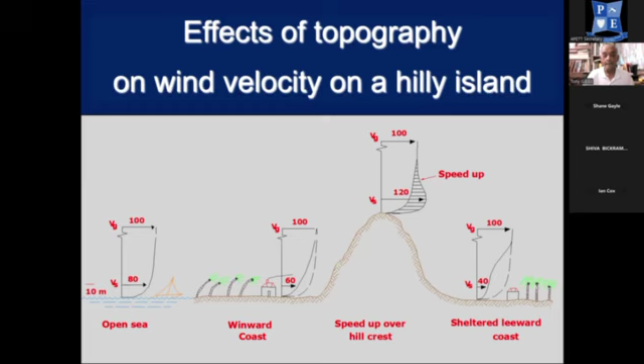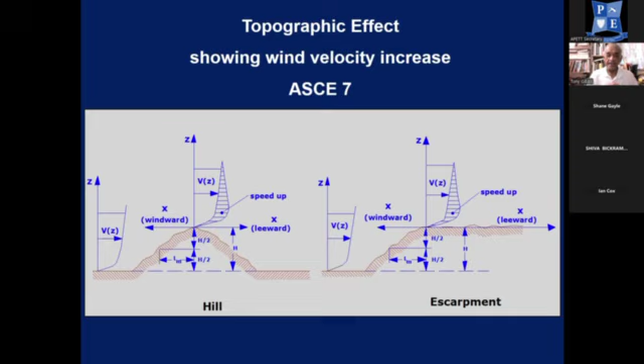In our wind loading standards, we do have guidance on how to deal with the topographic effect. In the popular American Society of Civil Engineers Standard 7, there are diagrams such as this, which provide indications of how to adjust wind speeds for topography. The numbers aren't on my slide, but they're in the ASCE 7 document, readily available to engineers online.

The next parameter we have to deal with is ground roughness, and that tends to be affected separately from topography, depending on the density of the buildup of the environment.

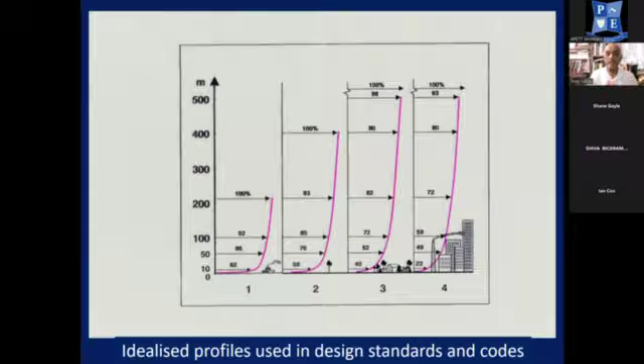Those are idealized. Now, in recent decades, we have been dropping what are known as dropsonde instruments through the eye walls of hurricanes to determine the real profiles as you go from the ocean up to the height where the airplanes fly. We do not drop dropsondes over land, only when the hurricane is over the ocean.

So these are real indications from instrumental measurements of the effects of height above the ocean on wind speeds, quite different from the idealized curves you've seen before. But you can't easily work with the reality in doing your calculations, so we do use the idealized curves.

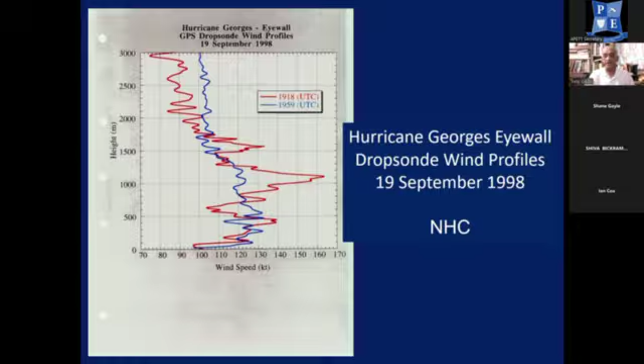These are dropsonde wind profiles from Hurricane Georges in 1998, and these are from Hurricane Ivan in Cayman in 2004. Again, it's quite far removed from the idealized curves you saw two slides ago.

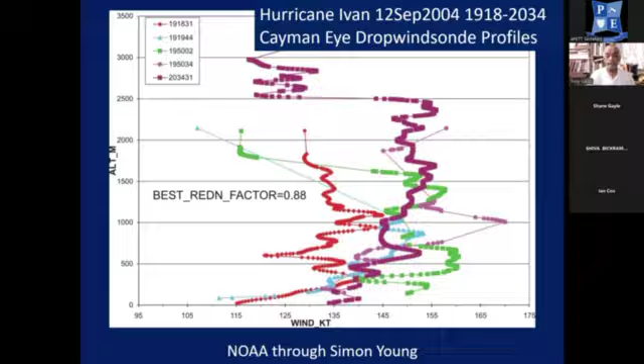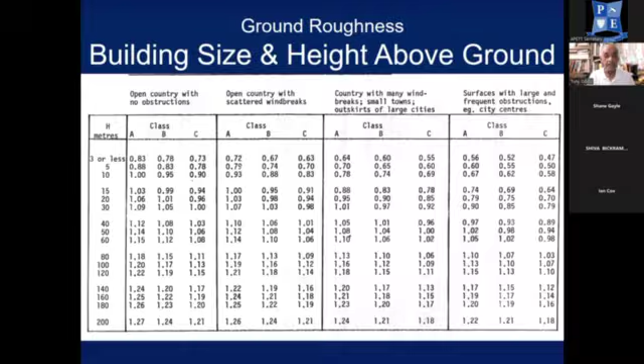A being components, very small elements. B are small buildings, and C are large buildings. This is what we dealt with in the 1970 Wind Loads for Structural Design, and we retained this table in the 1981 newer edition.

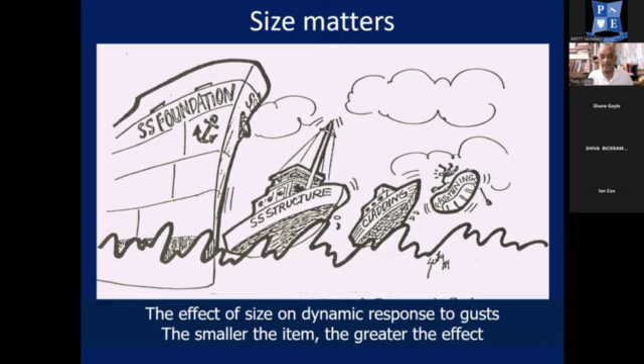If you have a very large tanker, it hardly recognizes the ripples in the ocean. A smaller, large fishing vessel is represented by SS structure, and has a greater effect from the waves. A small fishing vessel is like the cladding on a building, with an even greater effect. And a canoe, a very small structure, is greatly affected by the waves, which we call the fastening. So you go from foundations, to overall structure, to the cladding, to the fastening of that cladding. The smaller the element, the greater the effect of the gusts.

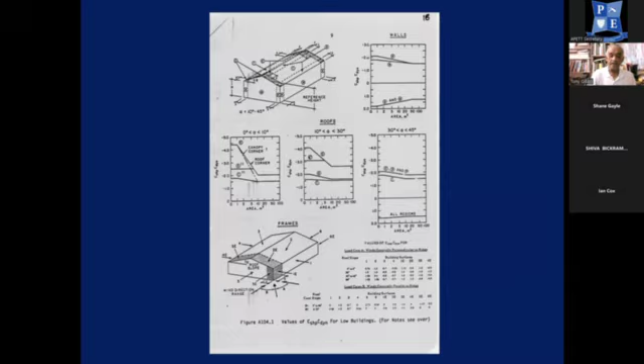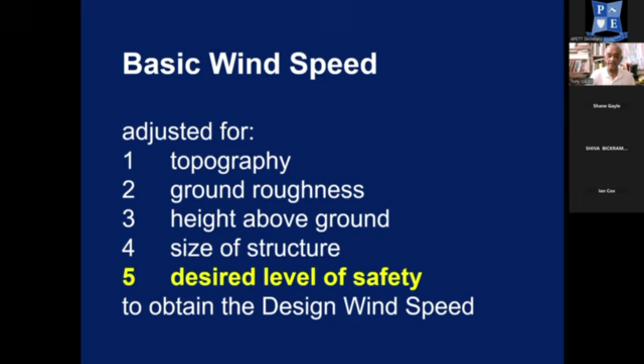Item 5 is a desired level of safety. Not all of our facilities need to be equally safe. Typically, temporary structures and farm buildings, like what covers our chickens in poultry farms, are given the lowest standard of safety. The majority of buildings in the community are given the next standard of safety up. Our critical facilities, such as referral hospitals, have an even higher level of safety than our domestic homes. And at the top of the line are facilities which, if they fail, would cause significant loss of life, like chemical plants and oil refineries. So the desired level of safety is adjusted depending on the kind of facility.

This is a very serious matter. We have been underestimating load factors for islands in the Caribbean closer to the equator for many years, islands such as Trinidad and Tobago. So the load factor increases as you move from Cuba in the north, or Bahamas even further north, down to Trinidad in the south.

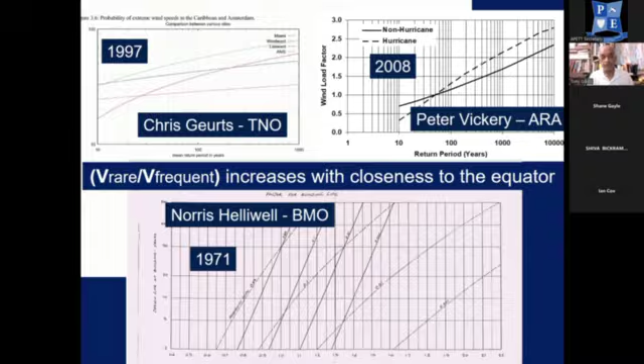It took Peter Vickery, much later, in his 2008 study for the Caribbean, done at the request of the Pan American Health Organization, to explain clearly what was happening. So Helliwell in 1971, Geurts in 1997, and Vickery in 2008 all came up with the same conclusion, that rare hurricanes divided by frequent hurricanes, the wind speed from rare hurricanes divided by the wind speed from frequent hurricanes, that ratio increases with closeness to the equator. And that has a significant impact on what we should be doing in Trinidad and Tobago.

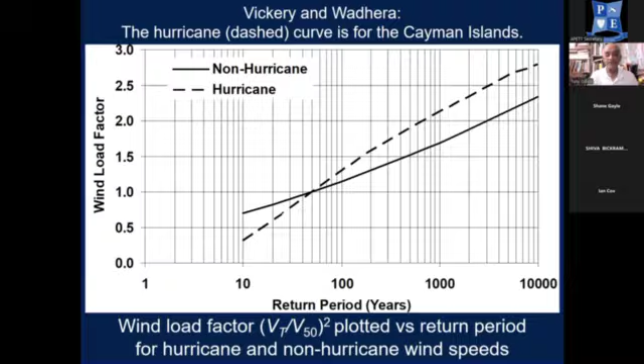This is Vickery's diagram, which he produced in 2008, and he did a revision to the wind hazards in 2019. He's retired now, but still a fairly young man. Why they retire, I don't know. But he felt he's done enough, so he's enjoying himself now.

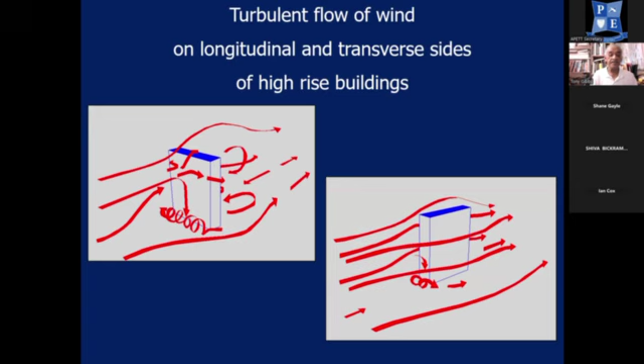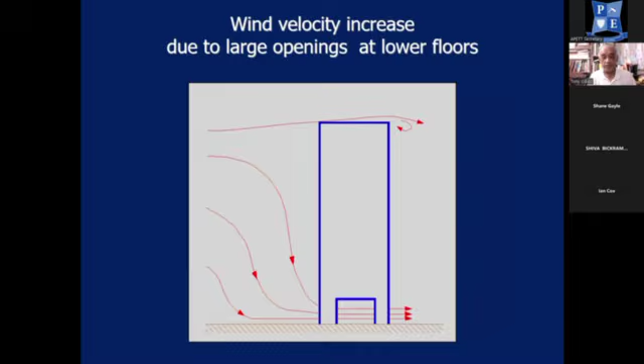So let's go to wind flow around structures. We can't see the wind, but if we put fumes or effectively put things in a wind tunnel, we can get visualizations of what happens as wind impacts on buildings. These diagrams give a general picture of the flow of wind around high-rise buildings. In this case, if the high-rise building has an obstruction upwind of it, or if it has large openings at the base of the building, you get an acceleration of wind speeds in that location.

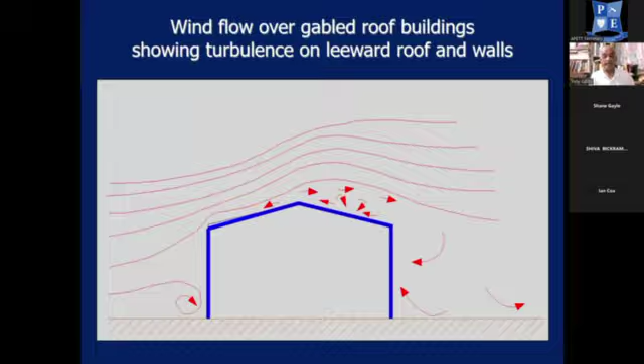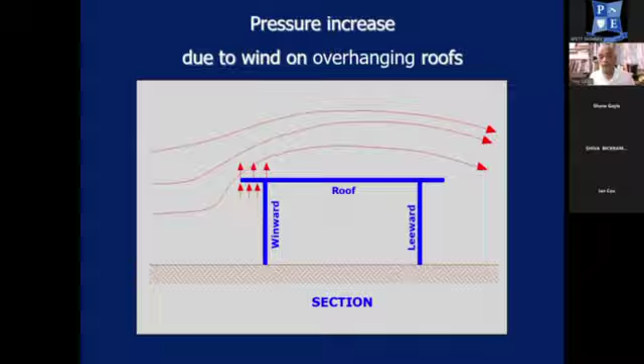This is a conventional industrial building with a portal frame. What you're seeing here is a lot of turbulence on the leeward roof slope and turbulence on the leeward face of the building as well. This diagram illustrates that if you have roof overhangs on the windward side, you get uplift suctions, and under the eaves, you get pressures. Those are particularly onerous forces added together for overhangs to resist.

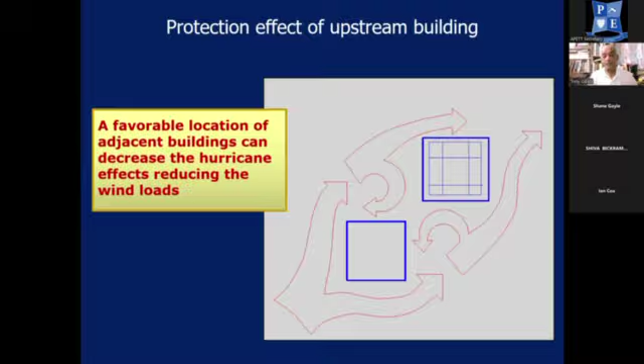Buildings usually are not in isolation, and buildings upstream of your building will affect the wind flow around your building. Of course, we can't determine for perpetuity what the environment upstream and on all sides of your building will be, but it's useful to have some idea of what it could be. In Melbourne, Australia, every new building downtown, as part of the planning process, has to be subjected to wind tunnel tests to determine how that new building will affect existing buildings and ground level wind speeds for pedestrians in the vicinity. That's a planning requirement in Melbourne, and no doubt in other parts of the world.

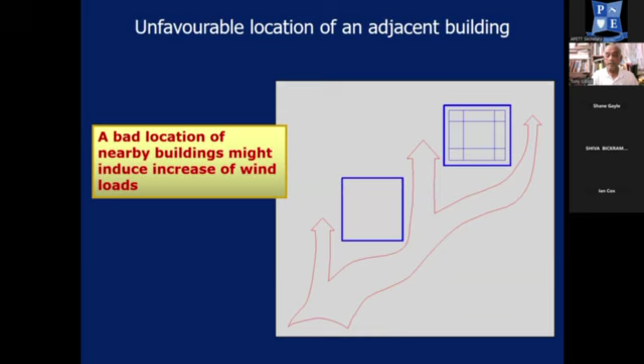So adjacent buildings do affect the flow around your building under investigation. Let's look at pressure distributions.

When the Sydney Opera House was being designed, wind tunnel tests on buildings were done in aeronautical wind tunnels, which were designed to determine what happens to aeroplanes, typically high above the ground. So these were smooth flow aeronautical wind tunnels. I was actually working for Ove Arup and Partners in London when they were doing the structural design for the Sydney Opera House. So in my old age, in 2025, as one of my bucket list items, I'm going to see the Sydney Opera House in December this year. It's a long trip. So the Sydney Opera House was tested in a smooth flow wind tunnel.

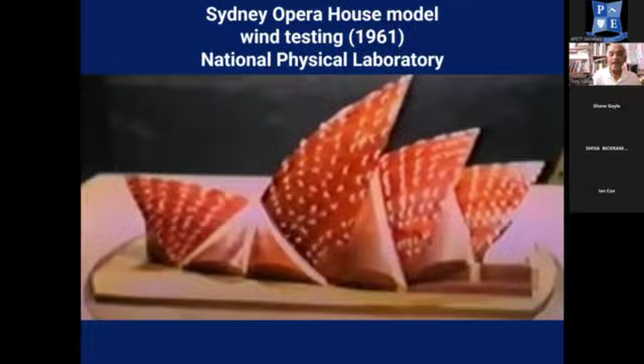What happened after that was that some young researchers, led by Professor Alan Davenport, who died of complications from Parkinson's disease in 2009, along with people like Professor Cermak in Colorado, decided that testing buildings in smooth flow wind tunnels was not realistic.

And they developed boundary layer wind tunnel laboratories. One of the most famous and groundbreaking ones was the boundary layer wind tunnel laboratory at the University of Western Ontario, and Davenport was at the forefront of that kind of research. He was one of the most famous and much loved wind engineers of the 20th century. I was fortunate to know him well. He was my mentor, and almost everything I know about wind engineering, I learned from Professor Alan Davenport.

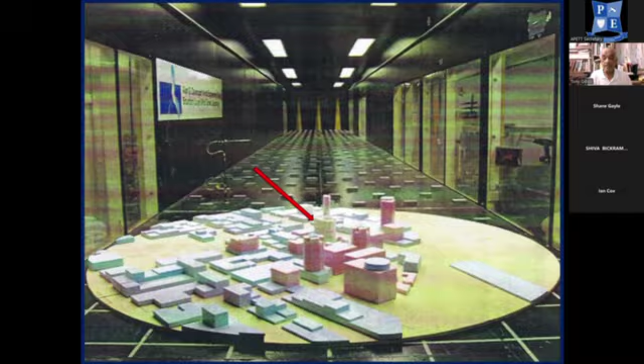This is a picture in his wind tunnel at the University of Western Ontario, and what you see in the foreground is a model of Port of Spain. The red arrow is pointing at the building being investigated in this particular experiment - that's the Ministry of Education building.

It was tested to determine the pressures on the glazing for that building. That was one of the purposes. Also for the loads, the horizontal loads from wind on that building. And thirdly, the effects of that building on pedestrian comfort at ground level on the pavements.

This particular picture is a close-up of the turntable in the wind tunnel. You can see on the upper left, Nicholas Tower; on the upper right, the twin towers of the Central Bank and the Ministry of Finance; and in the middle, in a cream color, the model being tested - the Ministry of Education Social Development building. In the bottom left-hand corner of the slide, you can see a photograph of the completed building.

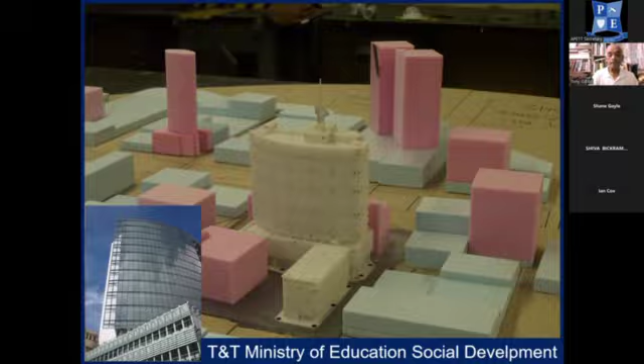So let's look at some pressure coefficients on different shapes of buildings. This is a simple rectangular high-rise building. It has 5 surfaces - 4 walls and a roof. The windward wall has positive pressure. The other 4 surfaces - the sides, the leeward wall, and the flat roof - all have negative pressures, or suctions.

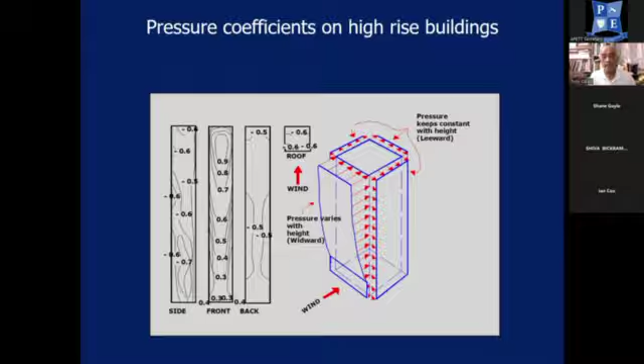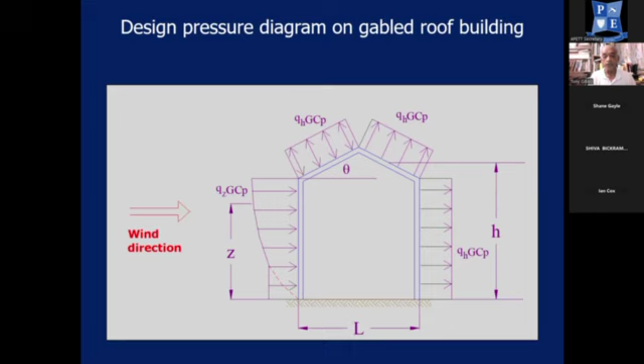What you'd also see is that on the leeward wall, the pressures are very even from top to bottom, whereas on the windward wall, it varies significantly with height above ground. In this portal frame building, you have the windward wall with pressures varying with height, and the leeward wall with fairly even, similar pressures from top to bottom. The windward roof can have either positive or negative pressures depending on the slope of the roof, but the leeward roof is always negative, always a suction. Again, in this building, you see the windward wall with varying pressures and the leeward wall with even pressures.

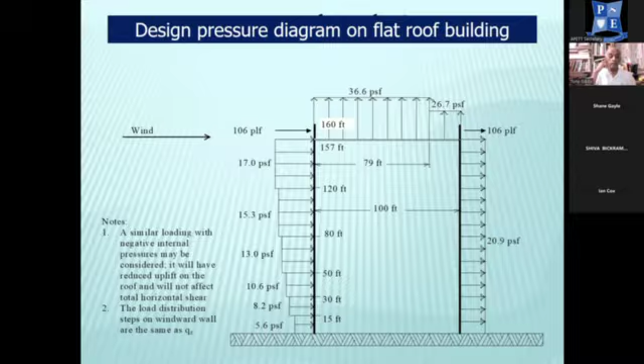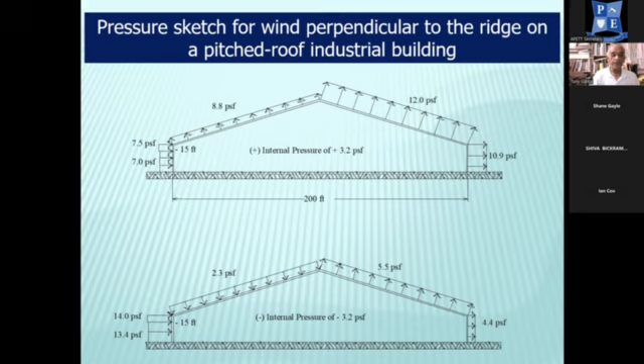In this industrial building, there are 2 diagrams. The upper diagram shows a situation with positive internal pressures, and the lower diagram shows negative internal pressures. So the internal pressures are the same throughout the inside of the building, but the external pressures or suctions vary depending on the shape of the building. The two are algebraically added to give you the forces for which you must actually design the cladding.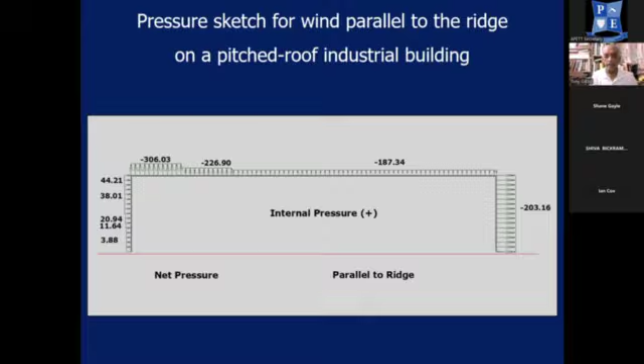If you look at that same pitched roof industrial building with the wind parallel to the ridge, this particular diagram shows the pressure distribution with internal positive pressure.

Now, there are ways of reducing the wind pressures and wind forces on buildings - there are things you can do. In the case of roof geometries, an increased slope would lead to a reduction in the pressures up to a point. So roof slopes between 20 and 30 degrees are favorable.

Hip roof geometries are safer than gable roof geometries. A lot of experiments have been done on this. The one I'm familiar with was done in the 1980s as an MSc thesis, also at the University of Western Ontario, and the results were interesting. They indicated that the average pressures for hip roofs and gable roofs are similar. However, the pressures are more evenly distributed over a hip roof than over a gable roof. Interestingly, one reason hip roofs are safer in hurricanes is that they require better quality carpenters to make them.

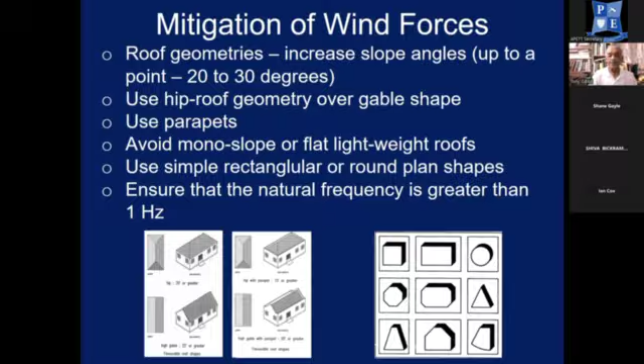So let's look at some examples of the effects on structures in the Caribbean. Commonly, the roofs suffer the most. Lightweight roofs suffer the most. This is from Hurricane Gilbert in Jamaica.

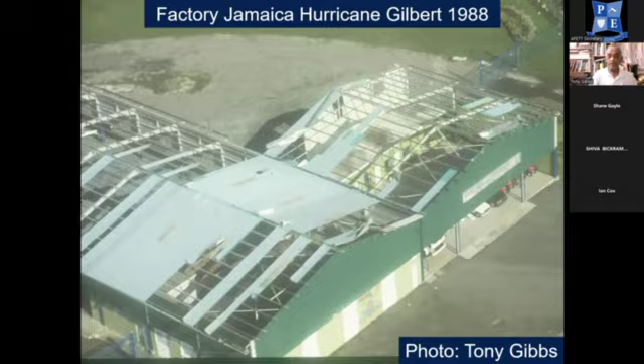When Queen Elizabeth II visited Barbados in October 1985, she did not have to compete with Marilyn Monroe, because the dressmakers for royalty know that wind lifts things up. So her skirts had little bags of lead shot sewn into the hems to keep the skirts down. So I'm sorry about that — we have no idea the shape of Queen Elizabeth II's thighs.

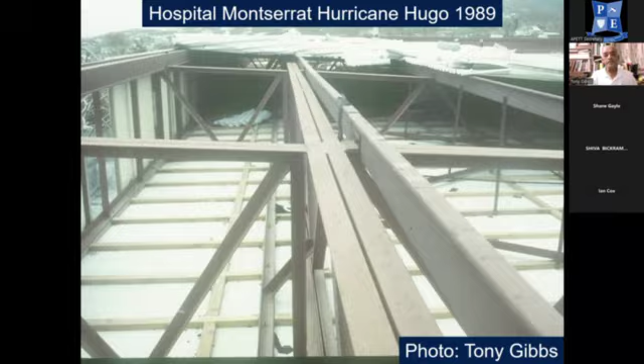In Montserrat in 1989, there was a major Hurricane Hugo. It took off two-thirds of the roof sheeting for the hospital, which, by the way, was designed in Trinidad. But the rest of the building was secure. Those roof sheetings were held on in the manner illustrated in this photograph. I took these photographs four days after Hugo, so many of the sheets were still intact, and I was able to take this photograph.

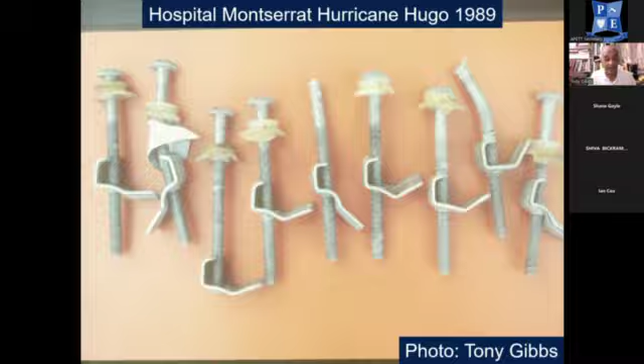I was also able to collect bags of failed connections, and you can see that some of them failed in direct tension. These are 7mm diameter aluminium bolts, and for them to fail in direct tension, I calculated that the upward wind pressures on the roof sheeting were approximately 150 pounds per square foot — quite significant. I gave one of my bags of failed connections to the Civil Engineering Department at St. Augustine so they could carry out experiments, but they never got back to me. If they did carry out the experiments, I never saw the results.

When you go to a place devastated by a hurricane, you usually relearn existing lessons; sometimes you learn new ones. This was new — for me, this was brand new. I'd never seen a failure of the longitudinal splitting of timber rafters in a hurricane.

I saw it in 1989 in Montserrat, three years later in the Bahamas for Hurricane Andrew, and in 2004 again in Grenada for Hurricane Ivan. In all those cases, what initiated the failure was a form of fixing of the rafters which I would have thought was very safe — drill holes through the rafter at the eaves point, thread a reinforcing rod through those holes, and encase the whole thing in the ring beam. But those holes drilled through the rafters were the initiation of the horizontal failure of those rafters. So what seemed to be a very safe fastening system turned out to be not at all safe.

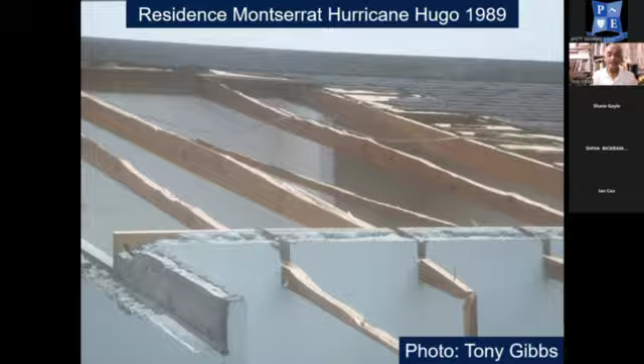I've seen that happen in Montserrat, in the Bahamas, in Grenada, and no doubt we'll see it again the next time we go to a hurricane-devastated country.

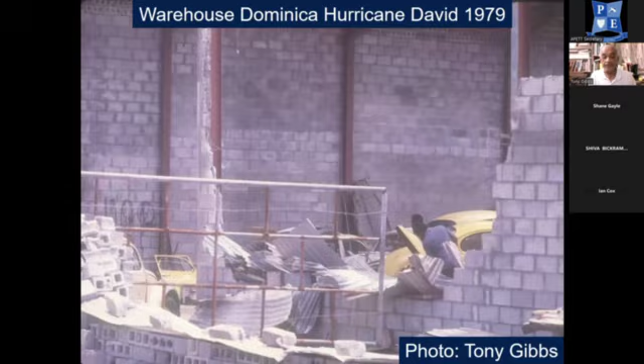People think that it's only earthquakes that destroy masonry, but wind destroys unreinforced masonry too, as you can see here in David in Dominica. People also think that if you employ top-class architects and engineers, you are ipso facto safe.

Not so. This hospital in Jamaica was designed by the firm Architects Collaborative, Walter Gropius's firm. Walter Gropius was one of the most famous architects of the 20th century — a German of Bauhaus fame, with a firm in Massachusetts, Architects Collaborative. They designed the Cornwall Regional Hospital near Montego Bay in Jamaica, whose wards had to be evacuated during Gilbert because the windows blew out.

Industrial buildings in Dominica.

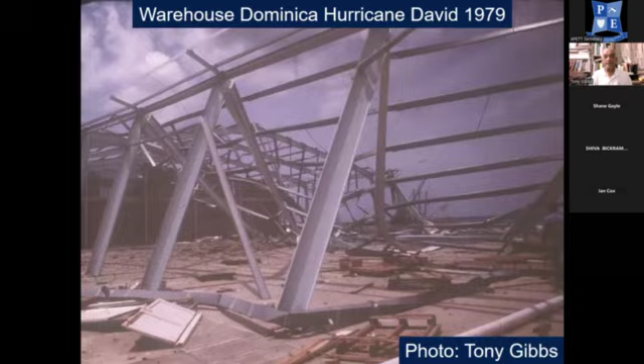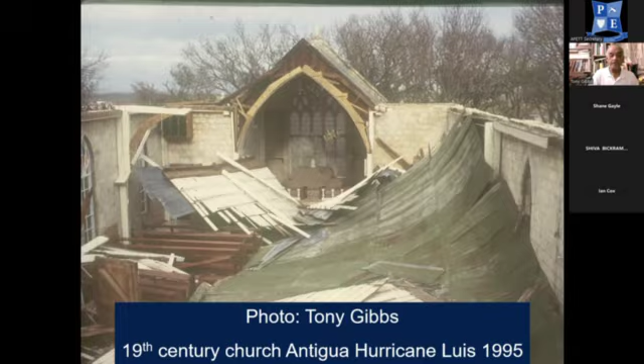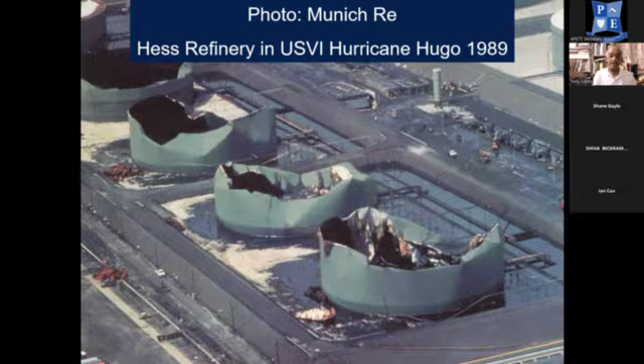Trinidad used to have a large oil industry, and at one stage Texaco Refinery was one of the 4 largest oil refineries in the world. But the largest oil refinery in the world in 1989 was the Hess oil refinery in the United States Virgin Island of St. Croix. Hurricane Hugo destroyed all of the oil storage tanks, and the Hess oil refinery never fully recovered. That refinery is no longer 800,000 barrels a day; it's a much smaller refinery, if it still exists at all.

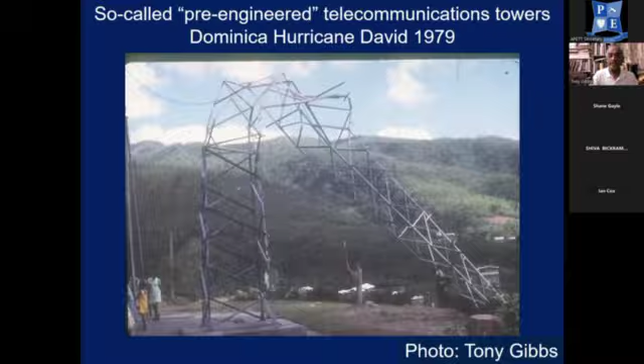This happens because in 1953 the first modern wind loading standard for the British Standards Institution was published, which had 75 miles per hour as the maximum wind speed. So a lot of these structures are inadequately procured. Be careful when you're procuring standard pieces of equipment.

So you don't need a fortune to be safe.

The 3 great churches on Church Street in St. George's, Grenada, were all destroyed by Hurricane Ivan in 2004. The Catholics repaired theirs soonest, followed by the Anglicans, but there were very few Presbyterians living in Grenada, and it took them a long time to get the funds to repair the Presbyterian kirk. They had masonry walls which were destroyed by Ivan.

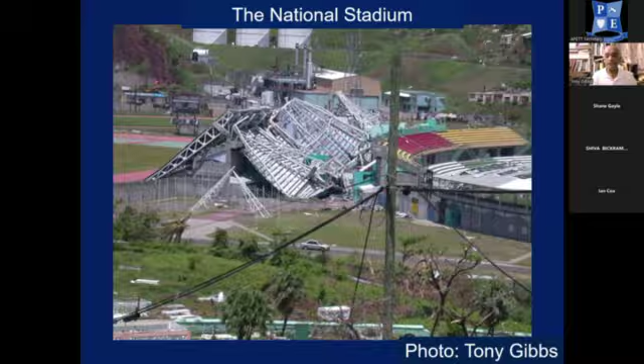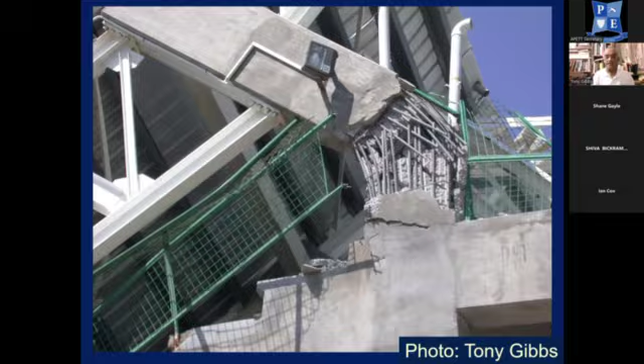As you can see, this is how they detailed the splices of the concrete columns to their bases. Can you imagine that this would happen in a hurricane? Can wind do this to reinforced concrete? It did. So any material can be sufficiently badly designed, detailed, constructed, and maintained to fail in a hurricane.

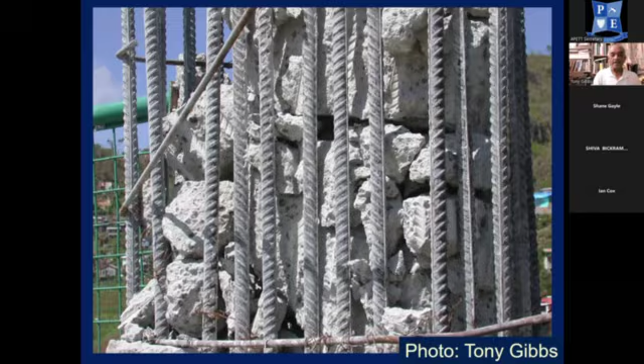Now let's talk about something else which is not commonplace: the understanding of the dynamic wind effects on solar PV ground mount systems. On the 8th of October this year, I, along with a former vice president of APETT, visited the largest solar PV ground-mounted installation anywhere in the Caribbean, at Brechin Castle.

Dynamic wind effects are crucial considerations in the design of solar PV structures, impacting their safety, efficiency, and longevity. The key effects include resonant vibrations, torsional galloping, and flutter. These phenomena can lead to severe structural damage if not properly mitigated. So understanding and designing for these effects ensures the resilience and stability of solar installations under damaging wind conditions.

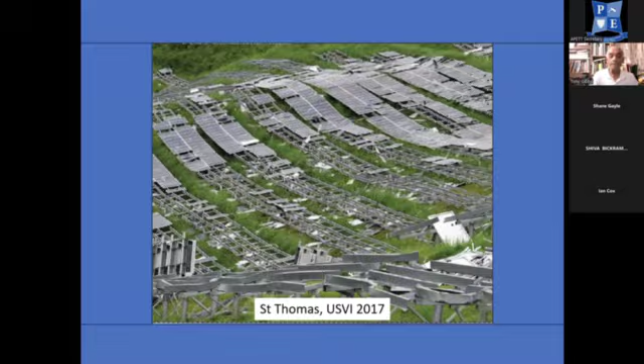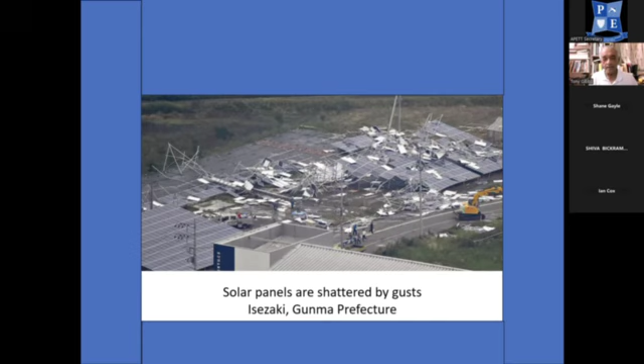Don't take it for granted that they're going to be safe. This is St. Thomas in the US Virgin Islands in 2017. And this is solar panels in Japan, a highly developed technological community, shattered by gusts in Isezaki, the Gunma prefecture in Japan.

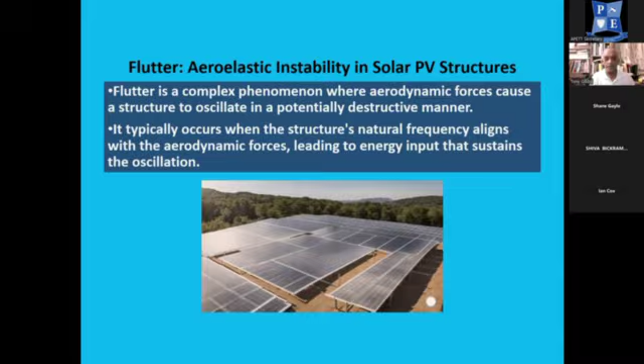Flutter, which is aeroelastic instability in solar PV structures, is not unknown. Flutter is a complex phenomenon where aerodynamic forces cause a structure to oscillate in a potentially destructive manner. It typically occurs when the structure's natural frequency aligns with the aerodynamic forces, leading to energy input that sustains the oscillation. If you look very carefully, you can see some motions in the picture below. Let's go on.

Two months ago, I was visiting a friend in Maraval, Port of Spain. And I could not believe my eyes because I saw demonstrated in the living room of my friend's home something I knew about, I read about, I studied, I understood from an academic standpoint, but I'd never seen it. And there I saw an example: classic fluid structure interaction.

When wind flows past a smooth cylindrical tower, it doesn't simply stream smoothly around it. Instead, you have boundary layer separation. As air flows around the curved surface, the boundary layer of air separates from the cylinder on each side.

You have vortex shedding. The separated flow forms alternating swirling vortices behind the cylinder. You have alternating forces. Each vortex creates a low pressure region on that side of the tower. The vortices alternate from left to right. The tower experiences a side-to-side force perpendicular to the wind direction.

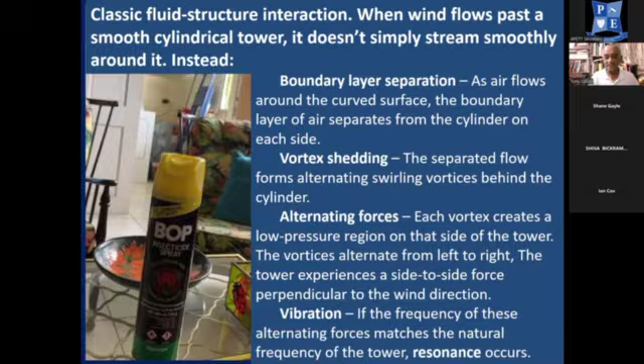Before the wind blows, we have to insure properties, or some of us have to insure properties. And the insurance companies need to have some idea of how safe the structures are. So they ask consulting firms to produce fragility curves, which predict what would happen to different forms of construction when the wind blows.

Typically, the most fragile buildings are timber construction and steel frames with lightweight cladding. A bit less fragile are reinforced concrete with masonry walls, and steel frames with infill masonry walls. And the least fragile is if you have all reinforced concrete construction.

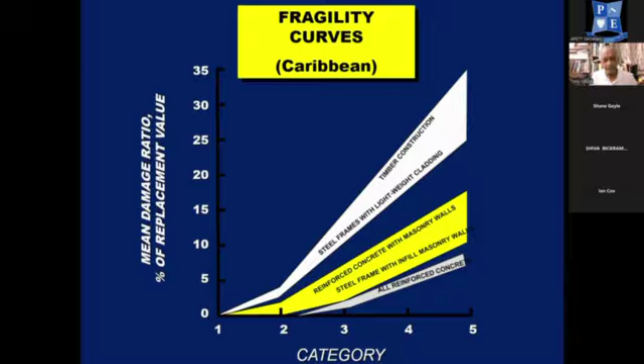So we produce fragility curves with greater or lesser degrees of accuracy for insurance companies, and they determine what premiums to charge you. And I personally have been blamed for the high premiums in the Caribbean because I have done many assignments for Risk Management Solutions in California, for AIR Worldwide in Boston, and for Guy Carpenter in London. These are institutions that advise insurance companies of how risky it is to insure in different parts of the Caribbean.

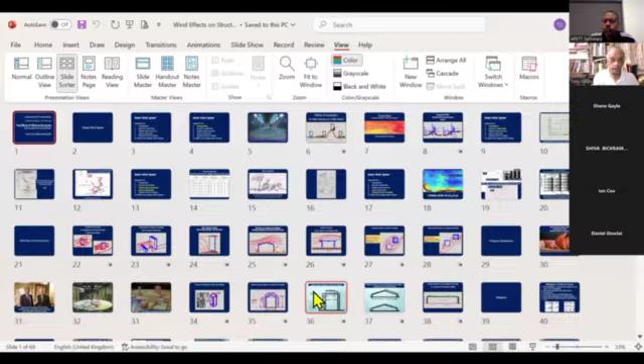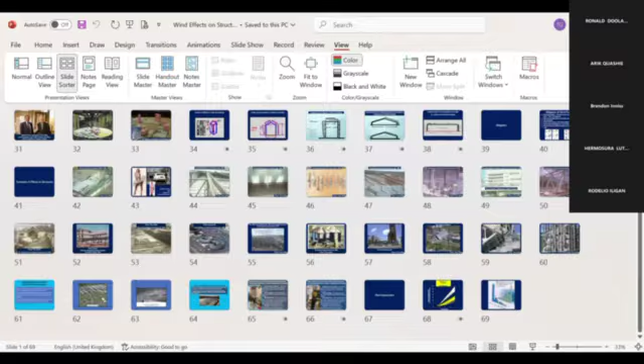I found it very interesting that with the last slide, as you pointed out, while we have reduced the number of deaths, the cost of damages has gone up. Do you think that is related simply to the expansion of development, or is it combined with the fact that there is a combining factor of low quality construction alongside the level of expansion of urbanization?

The building industry has become more highly competitive, and therefore people have incentives to cut corners.

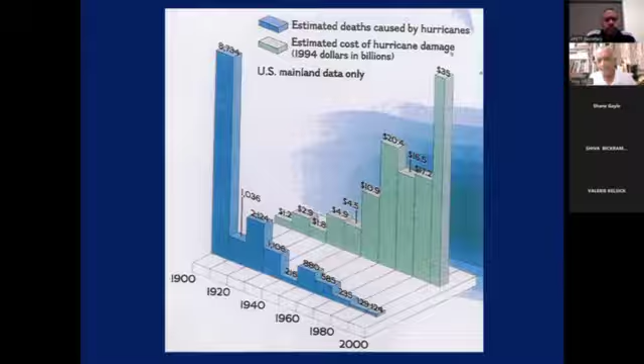But there is something else which bothers me significantly. The University of the West Indies has two independent faculties of engineering, one in St. Augustine and one in Mona, Jamaica. Both have departments of civil engineering, educating undergraduate civil engineers to practice in the Caribbean. Neither of those departments teach anything useful about wind forces on structures. I'm speaking from first-hand experience because I used to chair the Industry Liaison Committee for the Civil Engineering Department at St. Augustine. I've also spoken, as recently as the APETT conference last May, to the head of the Civil Engineering Department in Mona. In neither case are wind forces on structures being taught in anything like a normal academic manner. Effectively, it's not being taught at all. That's an awful situation we face in the Caribbean — a hazard prevalent in the Caribbean is not being addressed adequately by the major English-speaking university in the region.

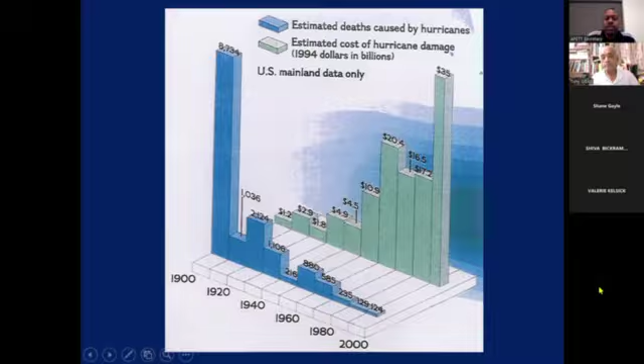I appreciate your sentiments, that's something definitely to be addressed. I can say from my own experience there was a lot of focus on structures, particularly seismic impact. So I'll confess, wind was not a high topic, and I expect it probably still is the case.

In terms of the damage you shared, that scene with the longitudinal failure of the timber rafter — just to be clear, the rod you spoke about that was bored through the rafter, would that have been horizontal through the rafter? Yes. So it would have threaded its way through all of the rafters, and that would have been the point of failure for the shear. Yes, that's where the damage initiated. It's a long-standing method where the rafter is set into the block and essentially cast in place with that rod. That's a long-standing method, but it turns out to be a failing item.

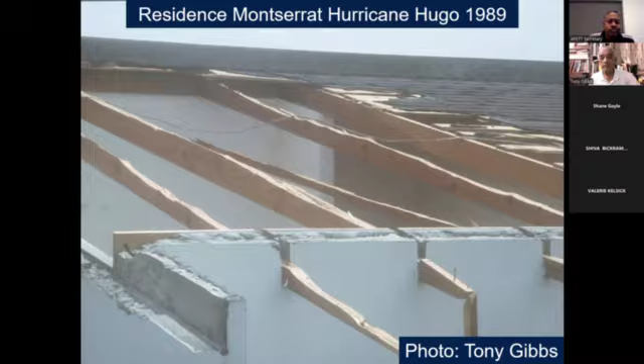More interesting to me is that the roof cover appears to be asphalt shingles, and that led to that type of failure. Well, the whole roof — the whole plywood sheeting came off, of course, along with the top halves of the rafters. Yes, that was eye-opening, because in discussions within the Caribbean region, you hear people talk about that approach and method as an absolute one that is definitively safe. And here we see pictures that show it isn't.

I thought it was a very safe method until I went to Montserrat in 1989. Yeah, but that lesson is not widespread — it's still exported as one of the methods to utilize. Similarly, in Trinidad and Tobago, where steel frames dominate residential roofing, the methodology used is to anchor steel into the concrete ring beam and weld it off. I think in recent wind events we had locally, there were examples where that method failed to anchor those roofs in place during extreme wind events. So it begins to show that the methods typically used on the landscape are not as safe as people think they are, and it begs the question of whether we need to put more information into the public landscape.

Yeah, there's a lot of work to be done, quite frankly. But the work to be done isn't that we need more information — there's nothing wrong with continuing research and increasing our knowledge of the phenomenon, but we already have enough information to produce safe buildings and safe structures. We're just not using the information. Right, application linked with good execution.